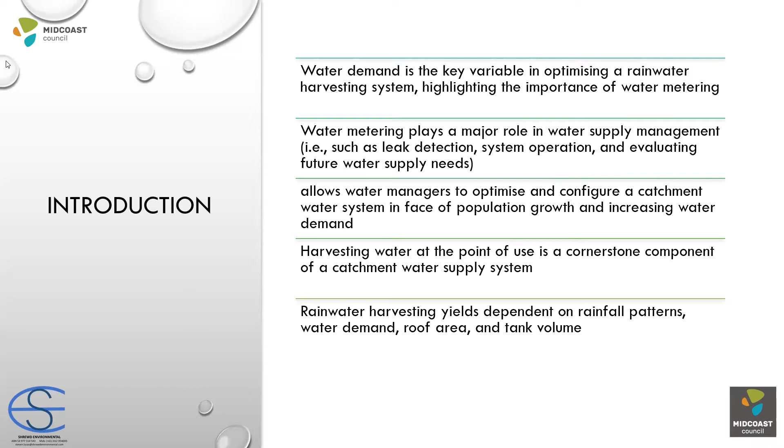The one key attribute of all this - rainwater harvesting is never included in this centralised philosophy. It has been over the last 20 years, which is great, but we're now at a point where every user has an opportunity to reduce their mains water dependency... in terms of caravan parks.

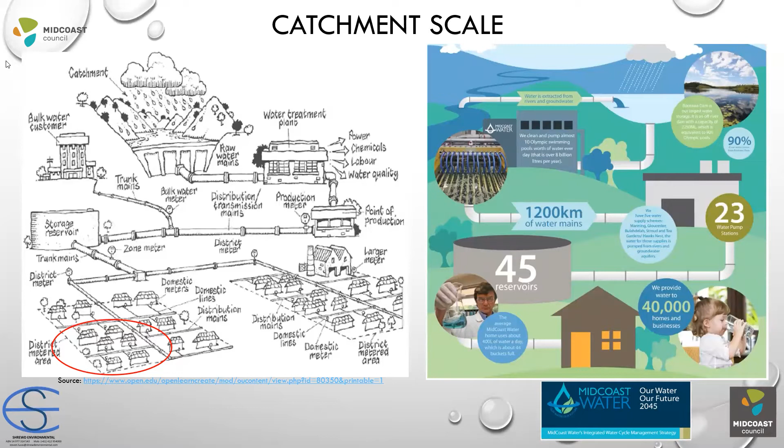Diurnal and seasonal water use patterns are quite important - I'll show you a couple of those later on. I'll talk about rainwater tank configuration, what a typical tank looks like, and what it means with a trickle top-up from the mains water supply, or one that stands alone. We'll also talk about rainwater tank dynamics - as a system perspective, to get the biggest rainwater yield out of any storage, you effectively have to maximise the drawdown. And by maximising the drawdown, you have to have an inherent knowledge of what's coming out of the tank each day. So again, I'll be trying to join up these dots as we go.

I use a couple of fancy models. The ones I use for rainwater harvesting are continuous simulation based, meaning at least 50 to 100 years at 6-minute time steps, and we capture the actual rainwater tank level itself. In previous studies, we've used water level gauges within rainwater tanks and found very high correlation, giving us a better understanding of that water demand which is so important to modelling and forecasting our needs for a catchment.

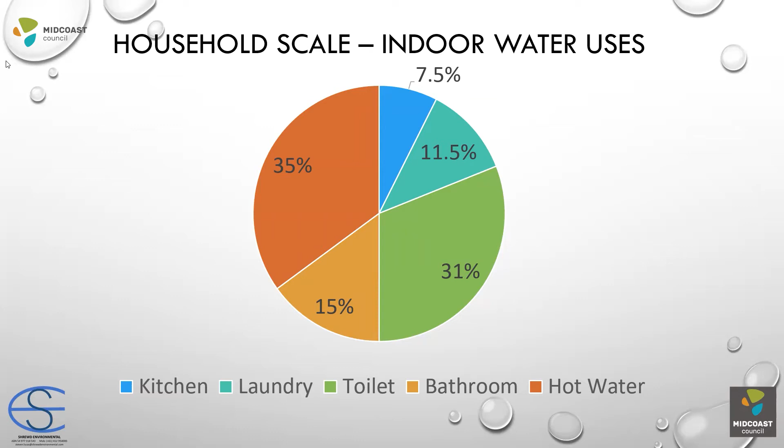I'll talk about household scale indoor water uses, and I'd like you to keep in mind that I'll be using household water use component data, because when we upscale that to the different uses within each caravan park, it becomes quite important. So this is a typical breakdown of indoor water use. You can see most of it's hot water, and toilet is obviously a large chunk there. To me, in a caravan park setting, those would probably be the two that comprise a large portion of that pie graph in an amenity block - a large amenity block, which by the way should have a lovely big roof area on it, which will be beneficial down the track.

When I conceptualise caravan park scale water uses, keep in mind I've seen some water use data from caravan parks, but not a lot. Just to take a little side here, my first experience working with MidCoast Water back in the day was with Graham Watkins when we were looking at all the smart metering around Tea Gardens and Hawks Nest. There were hundreds and hundreds of homes, and it was fascinating data to look at. You could pick up a holiday home where the outdoor irrigation system had blown up and was effectively leaking 18,000 litres a day - great insights into how the system works and how we can optimise the operation of these systems.

So tell me how wrong I am or if I'm close to the mark on this, but I look at a caravan park and I think, well, there's a lot of outdoor space, a lot of landscaping. Whenever I'm there, there always seems to be a bit of action going on in that space.

Again, this is some insight into, hopefully, as we keep this discussion moving forward, the sorts of things that we want to flesh out and then apply to what infrastructure and assets are available on site, and then take another level look and see what is actually required to implement a greater mains water reduction from all of these systems.

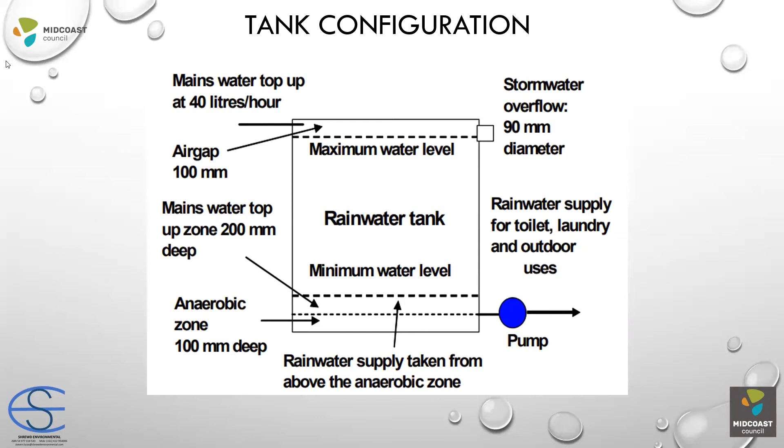This gives you greater headspace in the rainwater tank for the probability of rain. So maximising the drawdown is a very good thing because it means you've got a maximum amount of volume ready for the next rain event. To get that right, you need to know your water demand - how much is coming out of the tank - and how much is going in, which is more a function of roof area, which we'll talk about in a minute.

Tank dynamics. This was part of a study up in Brisbane a fair while ago, looking at the month of July in 2008. This is a 5,000 litre water tank, plumbed into the house. It didn't have a mains water trickle top up at the time.

It was very interesting because in Brisbane at this time, if you had a mains water trickle top up rainwater tank, it actually fell under the water restrictions. So if it was plumbed into the system, you suddenly have to become part of that system - if there's water restrictions, your tank is part of that water supply. There was a lot of toing and froing up in Brisbane, and I'm not sure where it sits now, but it's a discussion we'll probably have to have in the mid-coast area at some stage down the track.

While this is just a small snapshot of a given year, one month in a given year, conceptualise the benefits of harvesting this water at the point of use and using it, meaning you're not relying on the mains water supply. Having every water user in the catchment make a similar contribution to saving water, allows the catchment - with population growth and these sorts of things - to actually plan much better for the future with better water security.

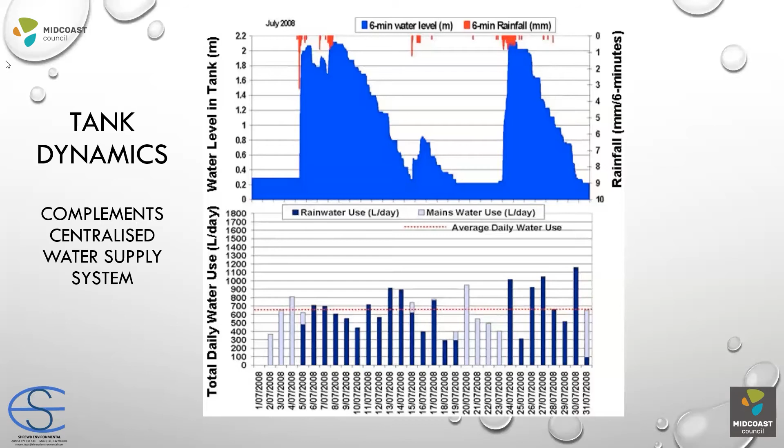Okay, models and modelling inputs and outputs. There's lots out there. Recent work I've done on Norfolk Island - CSIRO were over there doing a water resource assessment, and they developed a little app people could use on their phone, designed specifically for Norfolk Island conditions, weather, tank sizes and these sorts of things. But to me it's very rudimentary, using daily time steps for rainfall and water demand.

I'm not going to bore you all with the debate I've had with water industry people in the past, but daily time steps have never been good, because I asked the question: well, if the tank's full of water and you get some rain, do you take the water demand out of the tank first before the rain, or vice versa? Because whatever decision you make is going to influence your runoff coefficient.

The only way to understand how all of that fits together, even on a simple household lot, is continuous simulation. Some colleagues of mine developed some models a couple of decades ago, and we've been using those in our research for pretty much all that time. They do get published in papers, and a lot of them are quite well recognised.

There's a group we worked with called eWater back in the day, and they've got an incredible suite of modelling tools on their website - not specifically for rainwater harvesting, but more for catchment scale, like Source. MUSIC model is the one I use for water quality, and we can talk about that towards the end.

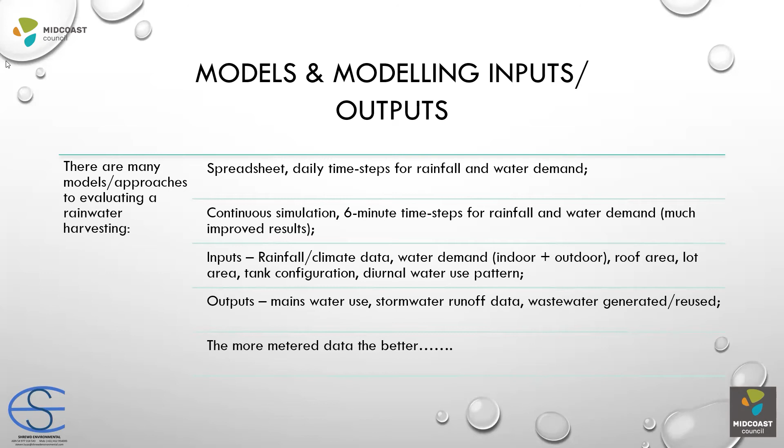I've pinched this from our recent Norfolk Island environmental assessment, because I will use Norfolk Island — guess what, they have no centralised mains water supply at all. It is all rainwater harvesting and groundwater extraction.

They have extracted so much groundwater that they've got none left. The climate's changing, they're getting significantly less rainfall than what they had. And in the process of writing up some of their water standards for their DAs, the question was asked, well, how does all this fit together?

And because they don't have any water meter data at all, no one's got a water meter on their house, no one can tell you how much water they got. They've all got an array of different tank sizes, from 10,000 litres up to 100,000 litres plus.

So to get across what the connection is between tank size, roof area and water demand, if you look at a 100 square metre roof, and the dotted line is just the 220,000 litres per year water demand that they believe they use, which is more or less a back calculation from the amount of water that rushes into their wastewater treatment plant.

So there's a lot of missing data in the Norfolk Island scenario, which fortunately for MidCoast Council, you've got that and more. If you look at the 100 square metre roof and the water demands in that little table underneath, you can see there's an inflection point around the 130 kilolitre per year mark, where it gets to a point where it doesn't really matter how big a tank you put in, you're not getting any benefits, and it starts flatlining out.

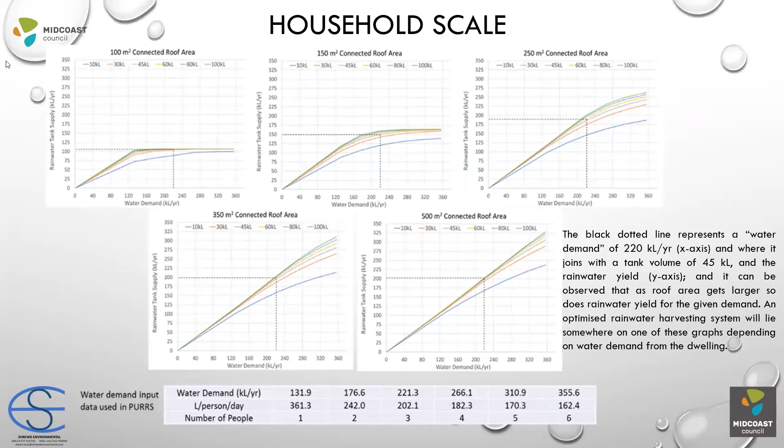The observations from the previous graph show that smaller roof areas are catchment limited. If you don't have the roof area, it doesn't matter what tank you've got, because you just haven't got the ability to harvest it. When I talk about rainwater yield, I mean if you've got a 5,000 litre tank and you let it fill up with water and don't use it at all, you've got zero yield. You've just got 5,000 litres sitting in a tank.

To increase that rainwater yield and the benefit from it, you have to keep drawing down that tank. For a typical urban block around Newcastle, a 5,000 litre rainwater tank will provide a 90,000 litre reduction in mains water demand. But they're important, and if every lot within the catchment looks at optimising whatever they have, this is where we start making real leaps forward in water management.

Larger roof areas become water demand limited, so unless you're using more water, it doesn't really matter how big your roof area is. Tank volume will vary depending on the land area and cost. If you're looking at firefighting requirements in off-grid areas, part of the requirements in some areas is that you have to have 20,000 litres just sitting there unused in case of firefighting. That's understandable.

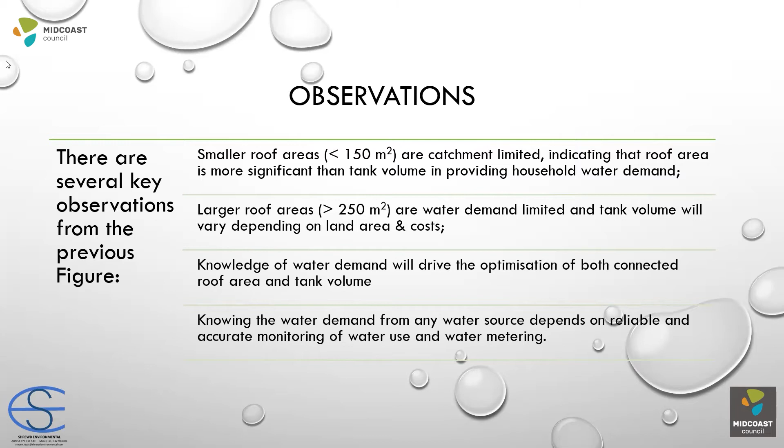Here's some data that John sent me. I only had the monthly data, so I used some very generic water demand figures. But what we're looking at here is just to demonstrate what I've been talking about before.

If we work on 28 megalitres per year with a 5,000 square metre roof area, you get that solid green line, achieving just over a 33% reduction in mains water demand. The BASIX regulation looks more around 40%, and I suspect that's why a lot of it still revolves around household water use rather than water users like yourselves.

But if you double that roof area, now 10,000 square metres is a hectare, which is a lot of roof area. It doesn't have to be one big continuous roof. This is where we talk about what roof areas are available in a caravan park and how they can be connected and optimised. You can see straight away that doubling that roof area means you probably only need a tank size of 1,000 kilolitres, which isn't super large compared to some tanks available out there.

But getting even more and more tank size beyond that isn't doing yourself any favours. So it's between the 500 and 1,000 kilolitre tank size with an increase in roof area, for a given demand of 28 megalitres per year. This was run through PURRS, so it did factor in diurnal patterns and seasonal changes as well. I just thought it's a good first place to start to demonstrate what can be done.

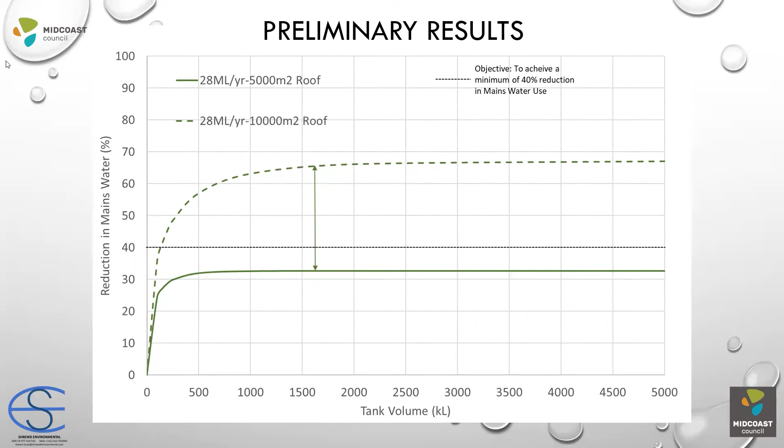But the idea is to look at all these different opportunities. One thing I'll throw into the MidCoast Water engineers now is it would be really good if you could have a tank that could supply several of these cabins at once. But I'm down here in Newcastle - if I built two houses on two separate blocks and supplied them from the one rainwater tank, I'm pretty sure that wouldn't be allowed.

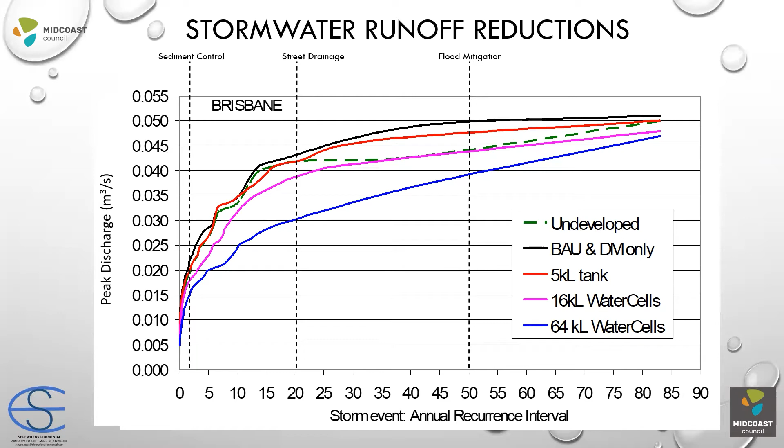For years, we've been talking about harvesting water off this rooftop just as a water security aspect. At this one farm, the red line is their roof area - you can see that they're generating, we're talking what, 130 litres per second coming off this site. Sorry, it's a lot more than that.

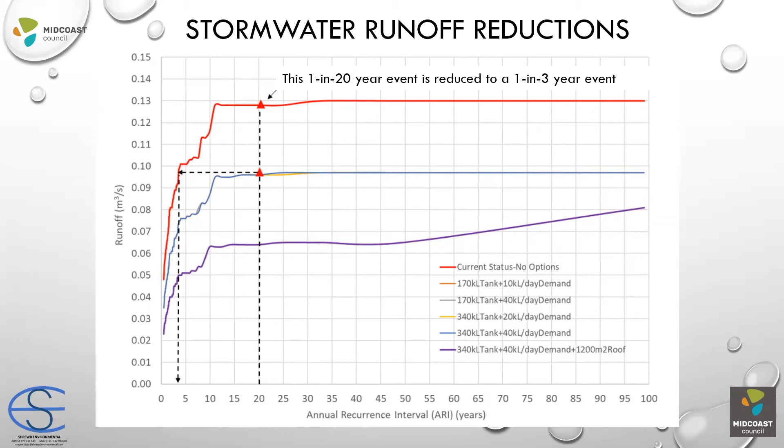Towards the end here, I thought we'd have just a quick look back. I know I've bombarded you with a lot of information and probably not much certainty on what are we actually going to do from here, Steve.

Well, here's where I'm thinking we can do it. From each of the perspectives of the caravan park, the water demand distribution needs to be evaluated to identify these opportunities. Some will be more obvious than others. Some, to be honest, just won't be viable to do. But if we don't look at them and evaluate them in terms of the context of the system, the water system within the caravan park, and the caravan park's position in the larger system, because this is where we're all leading to.

It's all part of the MidCoast Council Water Resilience Plan, which is the driver for this.

Any water source depends on reliable and accurate monitoring of water use, which again, big fan of metering, keep it up. If we can put in more, that would be terrific. We address the relationship between roof area, water demand, and tank size. I mentioned I'd like to see it seriously considered to join up, have a common tank to supply a number of cabins or accommodations within a caravan park.

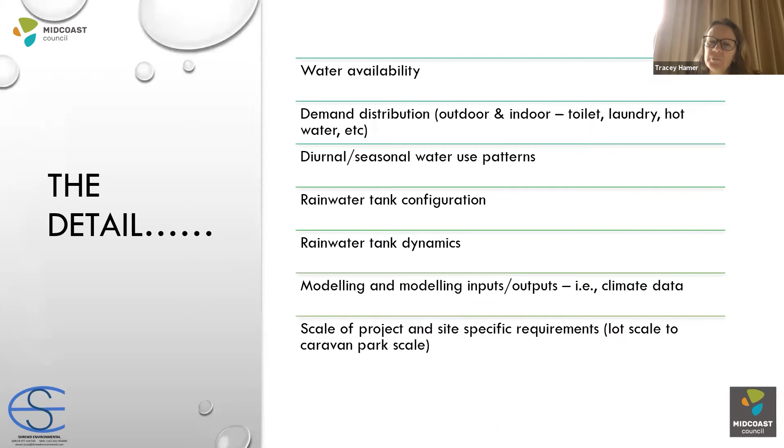So near the start, you showed us a graph that basically said we've got enough water, we're just not capturing it all. So is it really just money? And the impracticality of, I guess, retrofitting some houses with rainwater tanks?

Look, what you're saying is right. For all the time I've been in this, there's always a political side to a lot of this. I'll use Norfolk Island, Sydney Water, and Melbourne Water as examples. Melbourne seems to have been moving down the track of wastewater reuse and recycling a lot better than Sydney has.

Now, Sydney at the moment, as we speak, there's something like 1,100 megalitres of water a day being pumped out through the ocean outfalls. Yet at times when their dams run dry, we all say we've run out of water, but you can't run out of water if you're just wasting and pumping it out somewhere else. Now, it is a money aspect to turn that water back inland, but you need storage, and the bigger the city you've got, the bigger the storage you need. But I always argue that if you get the demand calculations right and know where your water's going, there's no reason why you can't have a circular water economy.

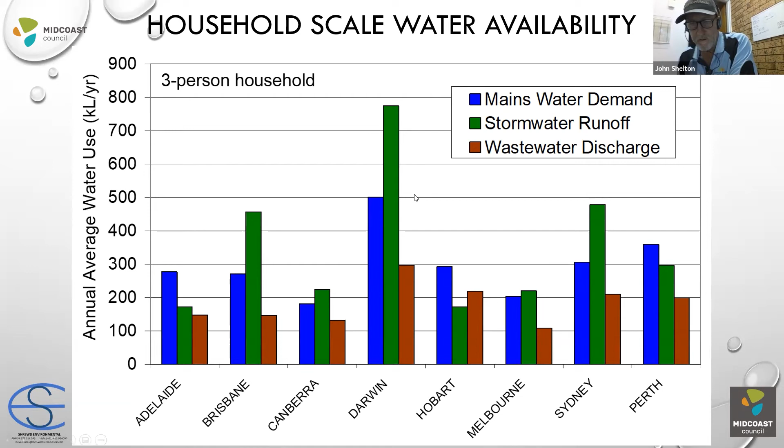We utilise some of that with the rainwater harvesting from that roof to run our toilets and urinals in that amenities block now. And have you got a water meter on that, John? No, I don't have a water meter on it. Well, there you go, Nirmal. There's a good prime candidate for a...

Again, because this is what you want to do. There's no reason why you can't monitor these things and then write papers and present them at conferences as part of the caravan side of things, because it is all vital. There's places I've been to, from Alice Springs to up north to WA, and every single one of them is different. They all have opportunities because they all get rain at some stage of the year, and different occupancy rates at different times of the year.

Yeah, so we're actually looking now into the same scenario for the other amenities block, adding some more tanks down there at some stage, in the tree area, in the pool area, which will allow us to do the same thing. So the fruits are there, we just got to work out ways of doing it and make sure we get it right.

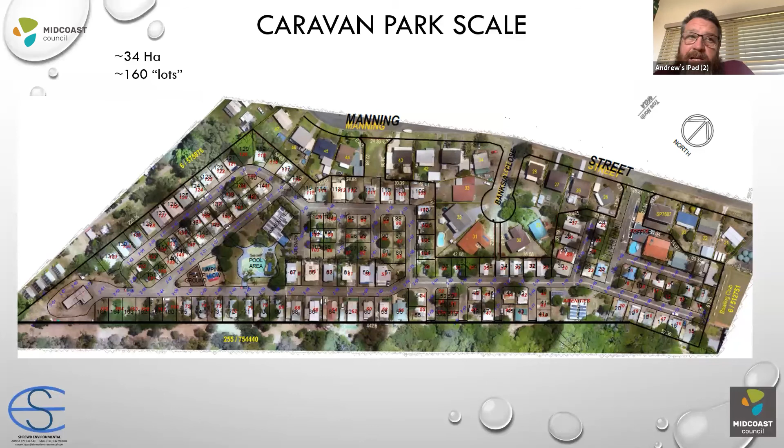Sure. The trend you're referring to, I assume, is when we had a massive quarterly water bill and took it on as a project to redo most of our mains across the park. That scared the living daylights out of us when we got the bill from MidCoast Water. We identified a lot of leaks using the smart meter, and we've been doing it almost daily since, to the point where I believe we're pretty good in the scale of things.

We're like 2.3 litres a minute constant use, meaning we've got a couple of very minor leaks. As you all understand, in a caravan park it's hard to get everybody to fix their tap washers and leaking toilets, so at 2.3 litres a minute, we're pretty good.

We don't want to sit on that though, we want to continue going forward. We're very keen for the water tank system. This workshop has answered a lot of questions for me - I was very single-minded that a water tank held 5,000 litres and that's all it could hold, and what can I do with 5,000 litres? Well, obviously I can do a lot with 5,000 litres the way it's being talked of now.

One of our major usages is cleaning areas, like pool areas in the morning. Our graph shows it's our major use of the day when we hose down that area. We've tried lots of other things - sweeping, blowing - but with the bats and birds and all those lovely things that leave stuff visitors don't want to see, there's really only one way to do it, and that's with water.

So yeah, we're super keen to get into it. I do have a couple of reservations around planning restrictions and health restrictions, things along those lines, but I'm sure with council on board it won't be too much of a hurdle to get a clear understanding of what we can and can't do.

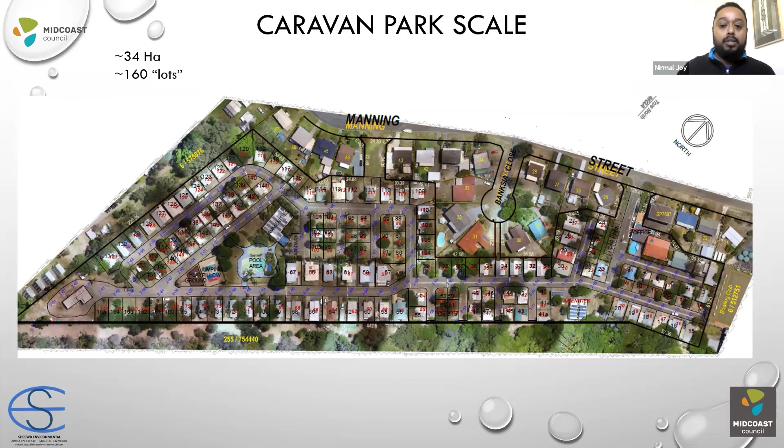Thanks, Andrew. All right, so let's bring this to a close. Special thanks to John, who let us use his sitemap and his data to do a case study and to be used in the workshop. Thanks, John. And Professor Stephen, thank you so much for your amazing input. I'm sure we are going out of this room with a bit of a change of perspective around how we can make use of that valuable resource. Thank you.